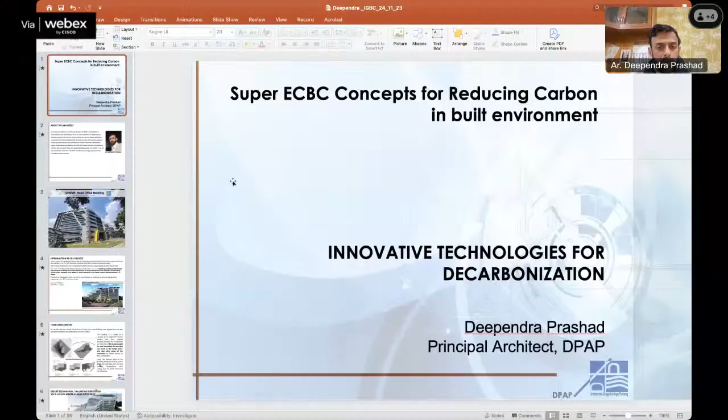Thank you so much for this invitation and for this opportunity to share some of these concepts which we've been working on for many, many years now. It's so heartening to see that the overall sustainability movement has really gained ground all over.

Here I will try and put down some thoughts and comparisons for some special buildings in our portfolio, which we have been working on.

This particular building project is recently completed. This is for the Uttar Haryana Bijli Vitran Nigam, their head office building, which is a Super ECBC building, the first Super ECBC building in the country. And it has various features, which I'll be talking about.

India is a land of two opposites. On one side are humongous developments suffering from carbon emissions, pollution, and so on, like the NCR, which we all know about. On the other side, we have these marquee buildings. Surely, to make an overall difference, we must make these buildings not special but common. They must become a major part of the built environment, and we have to also work on the existing buildings.

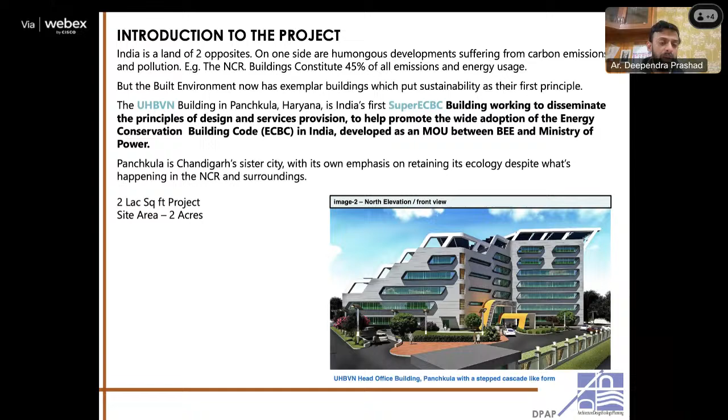Back to this particular project. The ECBC, the Energy Conservation Building Code, was developed between the Bureau of Energy Efficiency and the Ministry of Power. It was basically developed on the concept of looking at high energy intensive buildings and how energy conservation can be carried out in those. Initially it has had varied adoption in various states. At first, it was to do with only very high energy intensive buildings, but now it's been adopted for lower energy intensive buildings as well. So this is our project, I'll start talking about this.

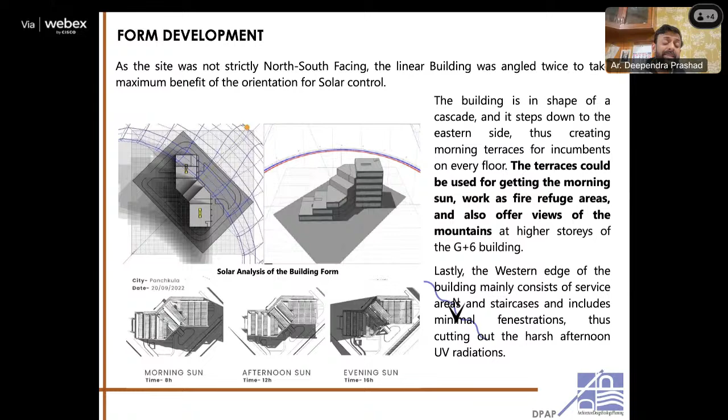So primarily, if the building orientation is like this, this is the north, that's the south, and that's the east and that's the west. On the top, you have an array, which is a solar covered array. On the western side, in the plan, we worked out service areas, staircases, and minimal fenestrations, minimum windows, to make sure that sun is totally cut off.

That's a 3D analysis of the same thing. Panchkula, as some of you might know, gets pretty hot in summers and also pretty cold in winters. So primarily the orientation, as we see, is north-south. This is the central entrance core, as we can see, and it works like this. Then on the right-hand side and left-hand side, you have office spaces. This central core also promotes natural cross ventilation, which runs parallel to the Himalayas, creating passive cooling.

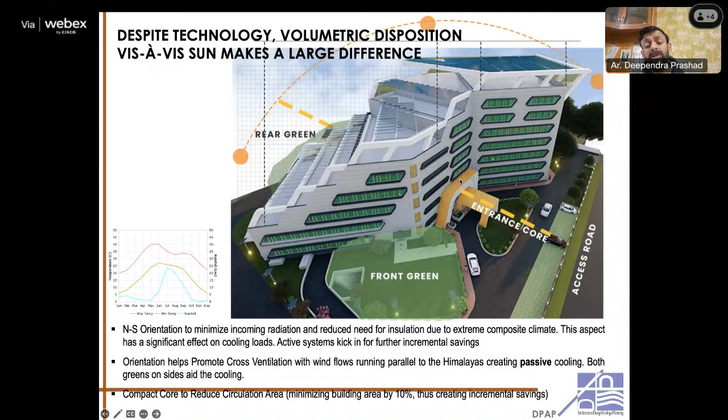The compact center also reduces the circulation area, which minimizes the building by almost 10%. Normally, when we're doing green buildings, it's also important to reduce waste areas because we build so much, and sometimes 50% of that is waste, not effectively used. So that's also an aspect of green building.

This is a picture which showcases the terraces. Here, the solar is actually raised because it creates shade for the terrace users. The lower terraces are for people to come out. The top terraces, where nobody goes, are filled with services, AHUs, plants, and so on, so all of that takes up space there. That also gets the benefit of a solar cover on top, because shaded equipment is healthier, more efficient equipment.

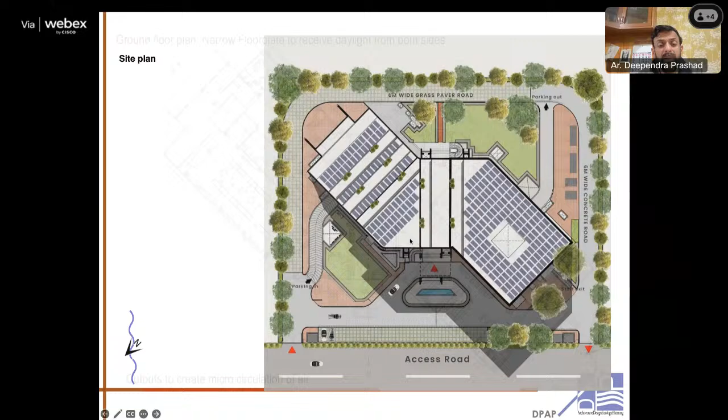Although it's a 2 lakh square feet building, we made sure that the building is linear and is able to get good natural light percolating in from both sides. Besides that, we also have two cutouts, one here and the other one here, to add to that daylight.

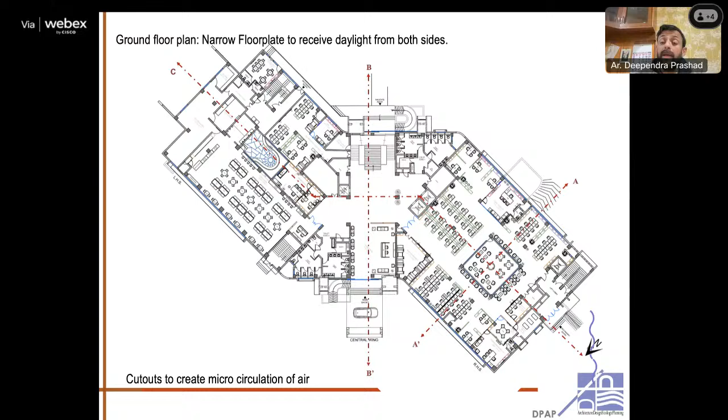This cutout, as you can see, has a triple basement below. These cutouts above also add to the natural ventilation, and as you can see, the windows are openable. That's very, very important — this building was actually built at the time of COVID.

Initially, the clients wanted or were looking forward to clean glass facades, which sometimes means you would just block off and have glass with no openings. We insisted that you need to have openable openings. But during COVID, when this whole issue of fresh air came up, it was a great win, and they were happy that ultimately they had gone in and chosen openable windows.

Together with the cutouts and the edges, we get very good daylighting.

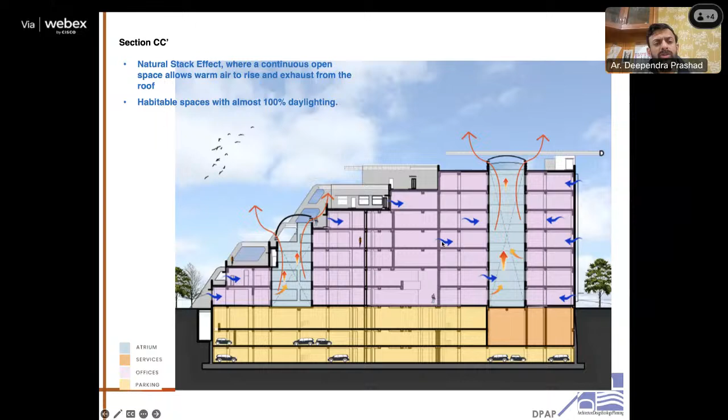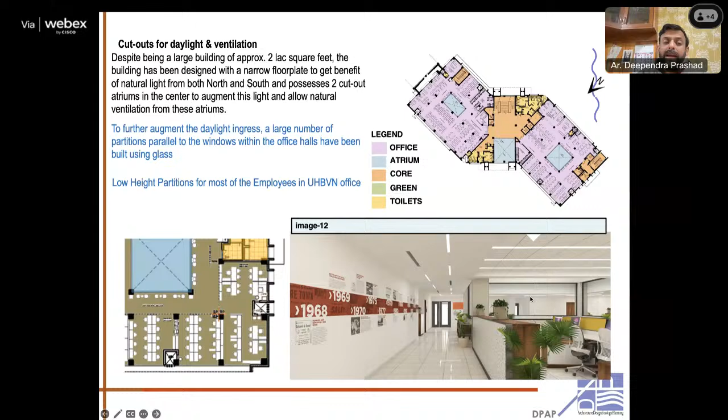Then the interiors have been designed so that you would have low height partitions or glass partitions, making sure that the light distribution would be excellent for all.

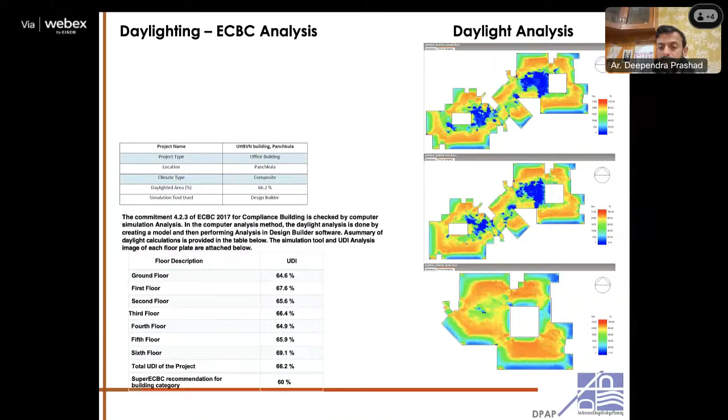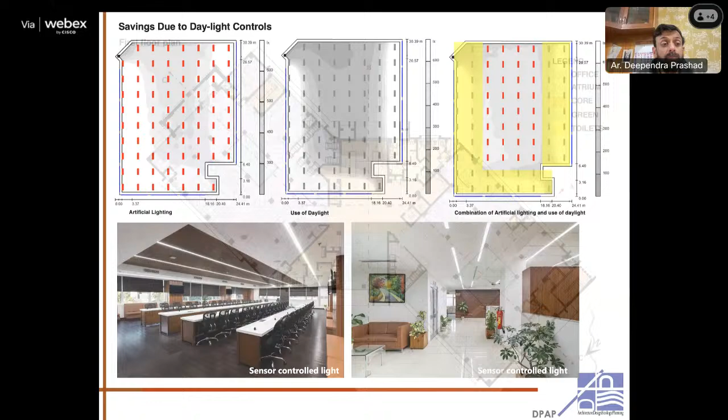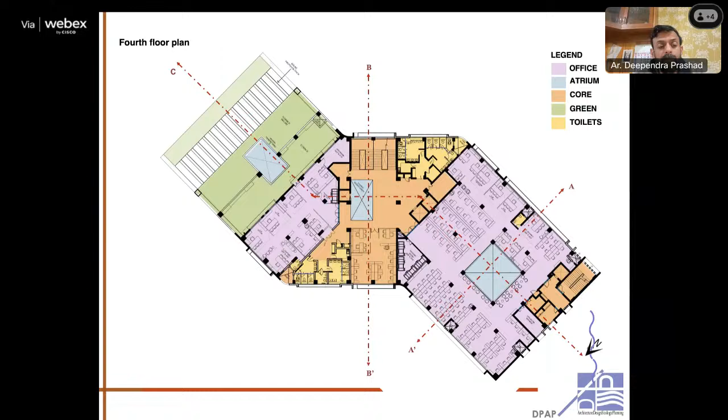Now we have the envelope. In this particular thing, how did we reach Super ECBC specifications? One of the things was the envelope.

We utilized a wall called a 3D wall, or TRIC wall — thermally reinforced insulated concrete, which has a thermocol core on one side, in the center, and then a wireframe basically crisscrossing it on both sides. Then you set up panels of these at the edges, one after the other, and after the panels are there, you shoot concrete on that — you use shotcreting on it. So basically you get a very highly insulated wall, at the level of an R value of 3, in this particular building.

This is done only at the edges to make sure that the incoming loads are minimized. Together with that, the roof terraces, wherever they are, all the stepped terraces basically have XPS panels and are topped with reflective light colored tiles. And of course the shaded ribbon windows, as we see them, have insulated frames of UPVC and highly efficient double glazing, which helps to reduce the air conditioning loads by 60% overall.

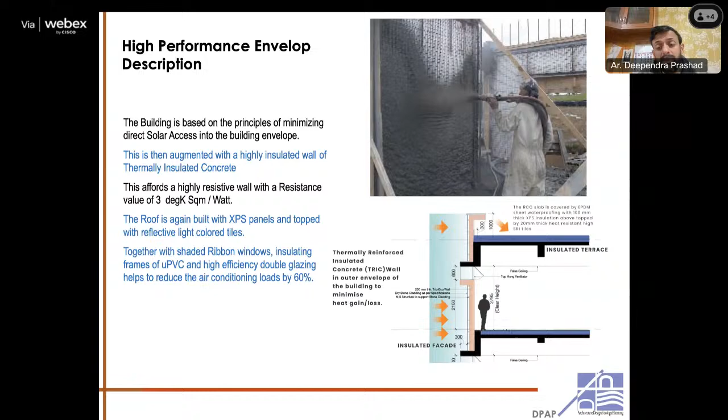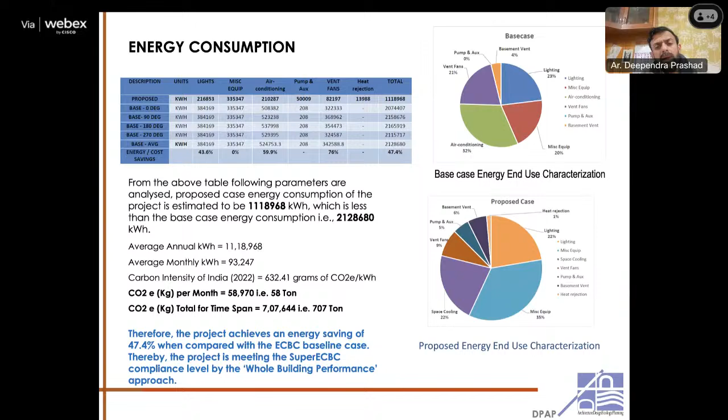Now this is further on the ECBC analysis, where from the base case to the proposed case, we get a reduction in energy of 47.4%, which again meets Super ECBC levels. And these are the charts basically talking about various aspects of that reduction.

The energy efficiency ratio of the HVAC equipment, instead of the base case of 3, is 5.77. We're having a high efficiency chiller, demand control ventilation, a BMS system, and pre-cooling economizers within the air handling units.

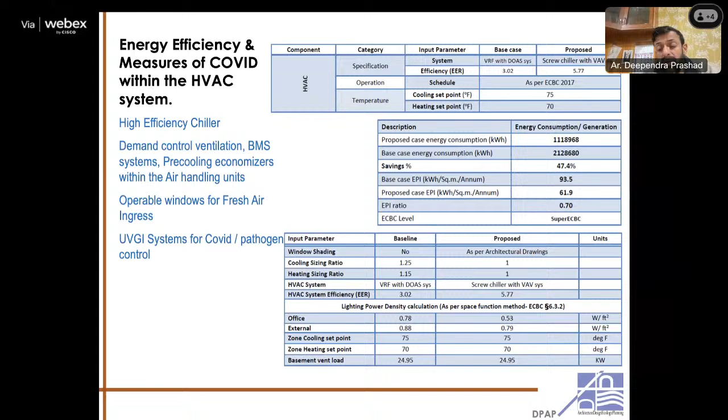We are having operable windows for fresh air ingress, as I said before. We also have a UVGI system for COVID oblique pathogen control. This is one of the first buildings installed during COVID times to include a UVGI system for decontaminating the air supplied to the inhabitants. Normally it is used in operating theaters to make those places absolutely infection free, but this was the first office building to utilize this same thing.

So that was about that project. Then, as a comparison, I wanted to show two more projects. One is the RBI building Dehradun, which has been made on the concept of building around courtyards, but with similar aspects of cavity wall insulation and solar. This is IGBC Platinum. The third building...

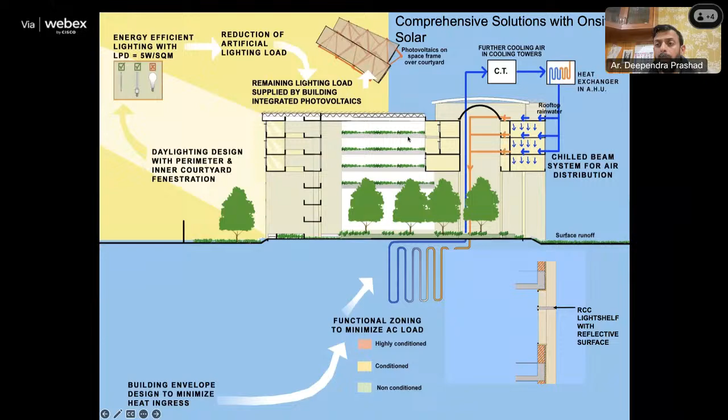is Indira Paryavaran Bhavan, which is the first net zero, large scale net zero building in the country, made in 2014, which included a range of measures including geothermal energy, complete solar, and so on. This is the building, and here the solar can also be called a shade.

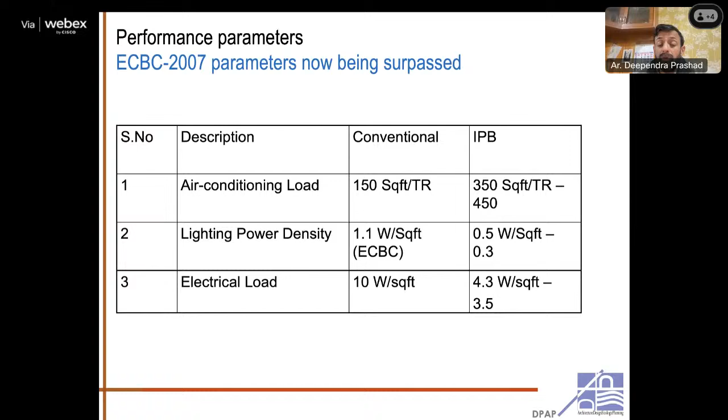These are the parameters which were being utilized, but now they are being surpassed. At that point of time, the ECBC 2007 was underway, and air conditioning load we had brought down from 150 square feet per ton to 350 square feet per ton, and now we are looking at 450 square feet per ton for various buildings. The lighting power density from 1.1 watts per square feet has been reduced to 0.5 and now is being reduced to 0.3. Electrical load from 10 to 4.3, going down to 3.5.

So net zero design basically includes pushing at all levels of work, starting from the N-S orientation, limiting the WWR which is the glass, insulation on wall and roofs, extensive greenery, maximizing daylight, lighting power density. So starting with the natural principles of building design and then going into technology like air conditioning, efficient AC. The natural principles of building design still rule the roost, they come first. As we say, passive design principles first, active design principles later.

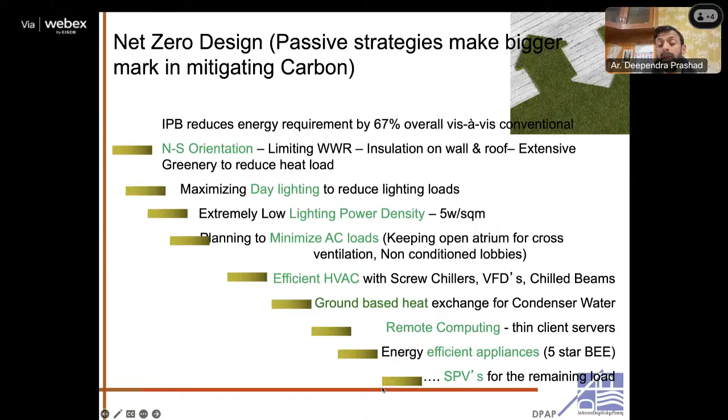And then finally we brought it down to about 33% of the energy load, and we use SPVs for that. So if we compare the three buildings, we see various values for carbon emission savings. What is important here is that the IPB utilized a huge solar bank on the top, and it balances its consumption with the solar bank production, so it's only starting to target carbon neutrality.

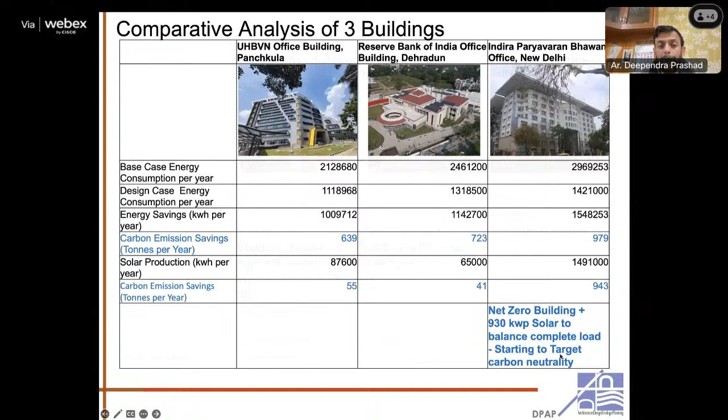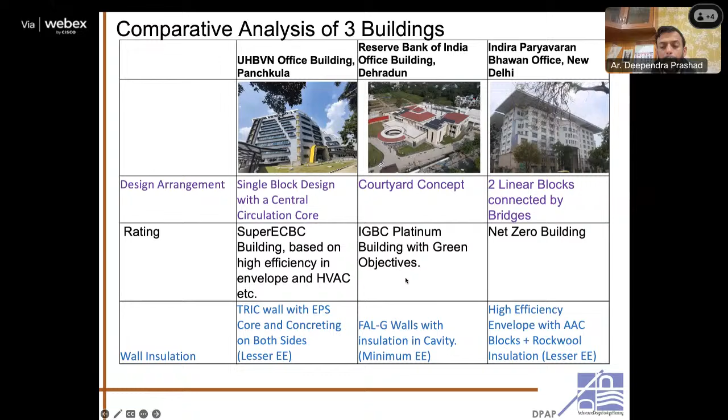The kind of insulations used are also different in each, as you can see. The insulation, which is an important aspect of energy consumption in a building after the orientation, is also varied in various places. Just to give you an example, you can have a 4.5-inch wall, another 4.5-inch wall, and a center core with EPS. This basically gives you an R of 2.1.

If you're building, let's say, in a village, and you can afford to do a thick wall like this, then a mud wall of 1 foot and another mud wall of 1 foot, with a 50 mm gap, can offer you the same resistance. In Indira Paryavaran Bhavan, we had a wall of 9 inches of insulation, AAC wall, and together with that we had additional insulation of rock wool.

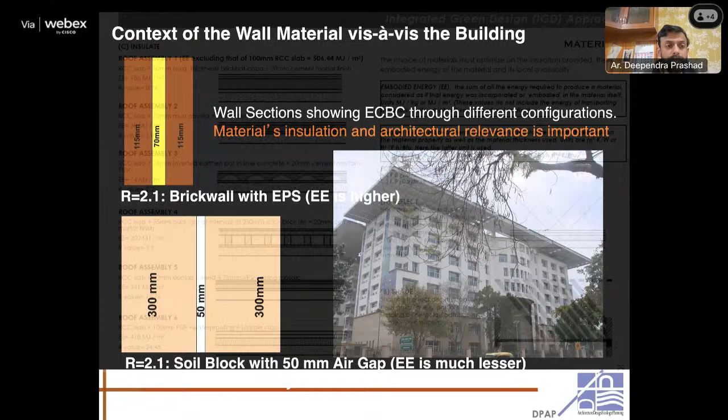This is a booklet which we have created, which you can find on the CPWD website in CPWD publications, which allows some very easy methods of calculating the appropriate R value to match the ECBC recommendations. So it's a good hand use tool which we have showcased and promoted all over.

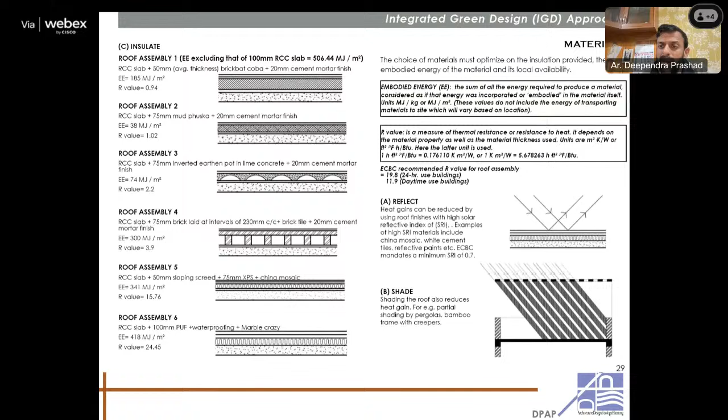This is my last slide. Basically, we have two kinds of buildings which are really coming up. If you see the picture on the left, this is a building actually from Auroville. These are our usual non-AC buildings, local offices, primary health centers, schools, which have a large overall footprint, but individual buildings are not very large. They normally have low embodied energy materials, little or no insulation, maybe a cavity, less glass.

For these types of buildings, pairing renewable energy targets carbon neutrality more easily. So you can have renewable energy paired with this, and you can target carbon neutrality. I was reading this article yesterday that the government, from a target of 100 gigawatts, was only able to match up almost 65 or 70 gigawatts.

And in that, the major shortfall was rooftop solar. The large solar banks on the ground which have been created have been there, but architects and engineers haven't been able to integrate these on the buildings. I think that is what is important.

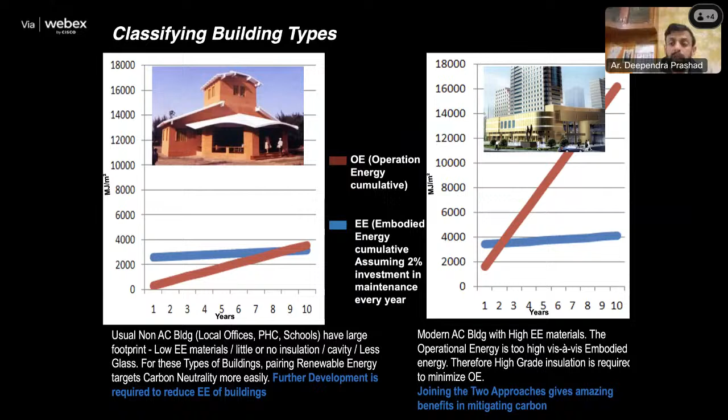But if you can join the two approaches, which is reduce the consumption energy and also reduce the embodied energy, then that will give amazing benefits in mitigating carbon in an overall sense. And carbon includes both embodied energy and operational energy. Thank you so much. Thanks.